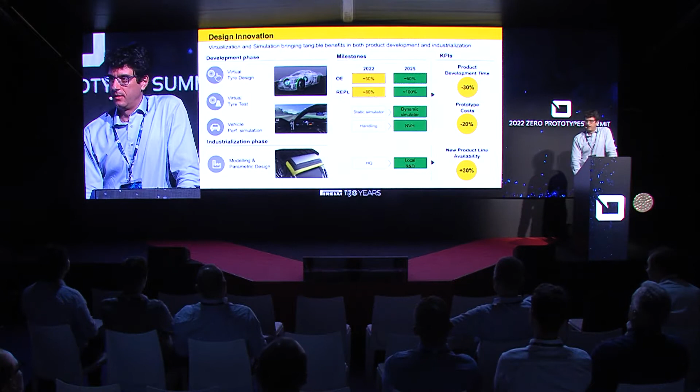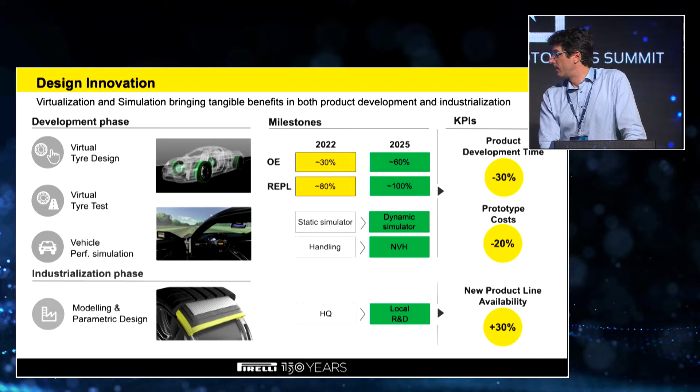Clearly, virtualization is the key enabler for this process. Virtualization that starts in the development phase from the virtual tire design that enables a kind of indoor virtual testing with simulations offline, and the second step, outdoor virtual testing with driver-in-the-loop simulators. The outcome of this process is that we are able to reduce by 30% the development time of our products, with the effect of increasing by 30% the availability of new products on the market, allowing us to reduce by 20% the prototype costs. Not yet zero prototype, but we are in the right direction, let me say.

Our plan is to develop for the original equipment. 60% of the projects that we develop for the original equipment will be engineered virtually, and all of the replacement projects will be designed virtually as well, in just 3 years' time.

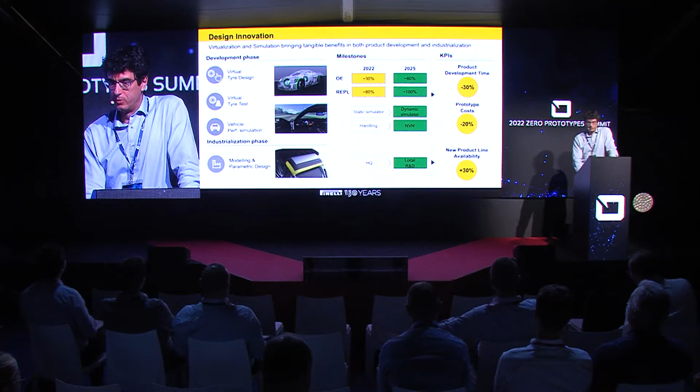Today we do this with the help of static simulators, mainly focused on handling. By 2025, we will do it with dynamic simulators, looking also at the performance of NVH, clearly. Well, we set a clear milestone when we started this experience and we set these targets for the company. The milestone was 2011, when Pirelli came back to Formula One, and we interacted with Formula One teams, which were already making extensive use of driver-in-the-loop simulations.

We started that path together with our partners, and then we moved from race to road, expanding these methods of development to road cars, and the first hypercar that was developed with a strong, intensive use of driver-in-the-loop simulators for the customer was launched in 2015. So at that time, we were mainly interested in the mechanical performance of tires, of the tire models.

But we soon realized that what is important for us is to create a tire which reflects the model performances. If until that time we invested a lot of research in creating models that were behaving like a tire, we had to add one piece, which is the other perspective: creating tires that behave like a model.

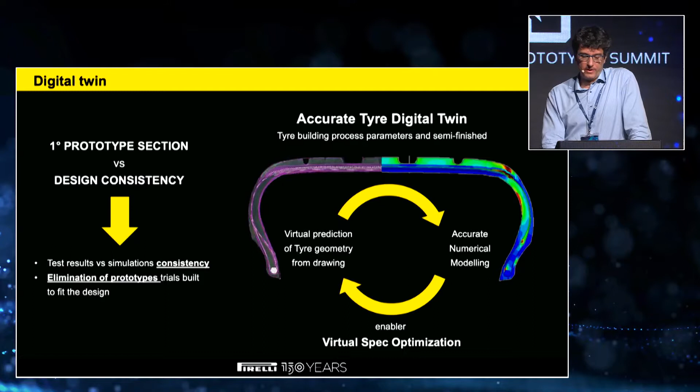And this, on the one hand, through virtual looping, reduces the development time. On the other hand, we also reduce the number of prototypes in the factory, because we don't need several iterations in the factory anymore to achieve the proper geometry, but we build the tires in the very first building, very, very close to the original drawing.

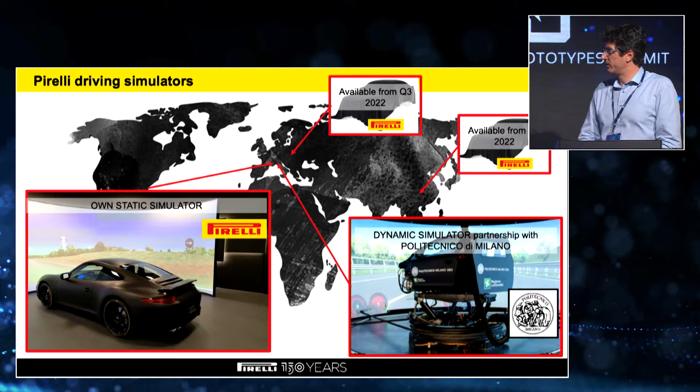So once we had this process in place, we decided to invest in this technology. We have a static simulator available in our facility in Milan. We have a collaboration with the Polytechnic of Milan, where they have a DIM 400. And then 2 new simulator facilities will be delivered to Pirelli in Germany and in China.

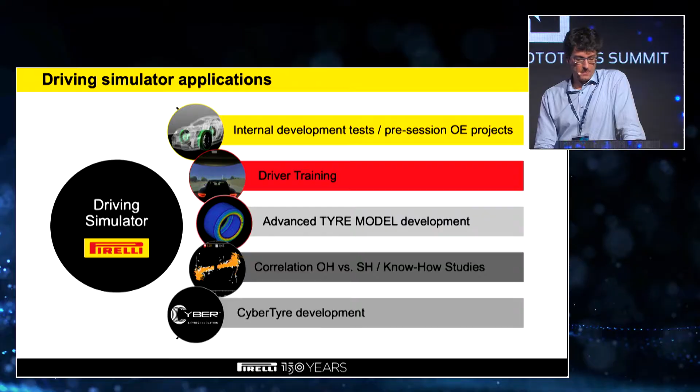So what do we do on all these facilities? I put some of the activities that we have in mind and are already doing. Clearly, development for replacement and original equipment, driver training. We do internal research on advanced tire models, and I will say in a minute why we do it. We do correlation work between objective handling and subjective handling, obviously, and we also do Cyber Tyre development.

So let's see in a bit more detail what we do, the way we see virtual tire development. First of all, we need a very close partnership with our customer in the original equipment environment, because we work on vehicles which are not on the market, and we have to exchange models with the customer. Models flow from Pirelli to our customers, tire models clearly, but models also flow from the customer to Pirelli, so that we can work on the next generation of vehicles in-house. We exchange encrypted models, which is a very good enabler for this process.

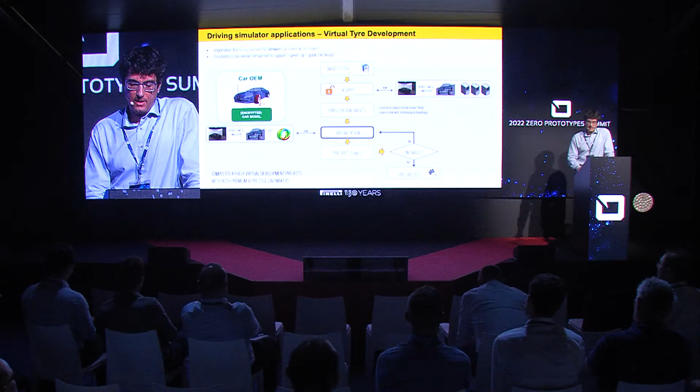We have from the customer a target letter, which is a heterogeneous document with target sets on KPIs, target sets for the tire itself, KPIs on the tire mechanics. There are some targets which are referred to the system, vehicle and tire, with KPIs typical from the vehicle dynamics. And there are some subjective targets which are a function of the system, vehicle, tire, and driver, clearly. So this is the key point.

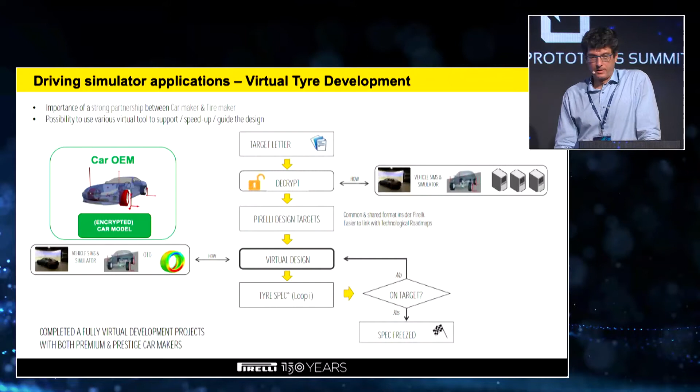With the use of simulators, we can translate all of these 3 kinds of targets into tire targets, Pirelli design targets. We put the driver in the loop, clearly, and we translate the subjective feelings into a real mechanical behavior for the engineers, so that we have a clear target for our team. This accelerates our development, because it's no more a matter of chasing a subjective feeling, guessing what the tire mechanical properties should be, but we have engineered that subjective feeling.

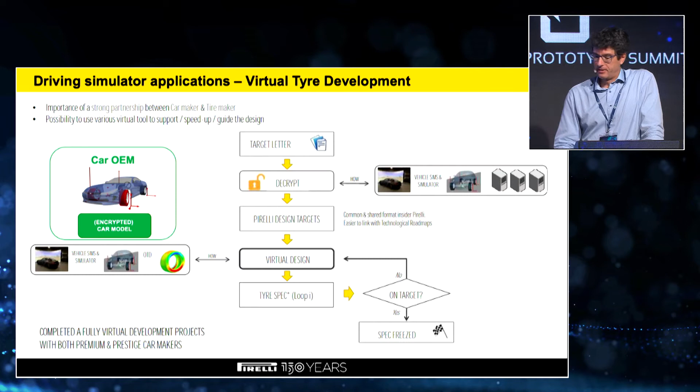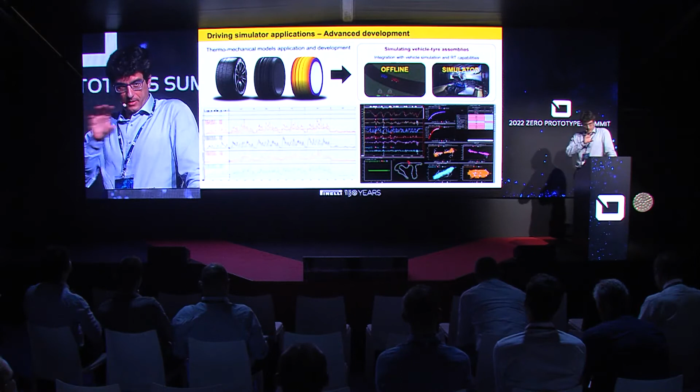The tire mechanical target is just representative of its behavior, like in the industry, you know very well, like a magic formula can represent clearly the mechanical behavior of a tire. We think that we have to go to that goal with physical models also. So that's why we develop advanced physical models on the simulator. Frankly speaking, these models are already available in Pirelli for offline simulations. They have to be tuned and developed to run in real time, and we think we will be very soon able to run these physical models in real time with additional information from thermomechanical behavior, let me say.

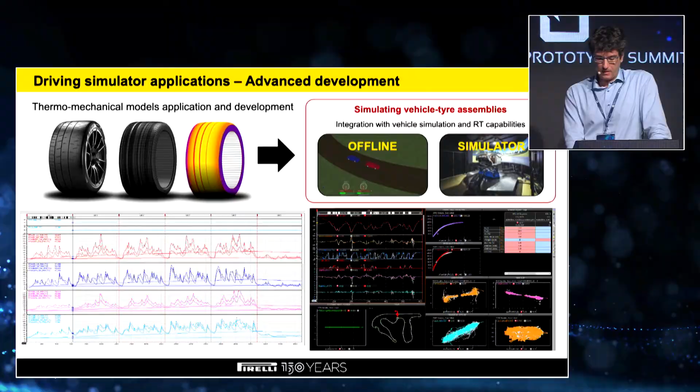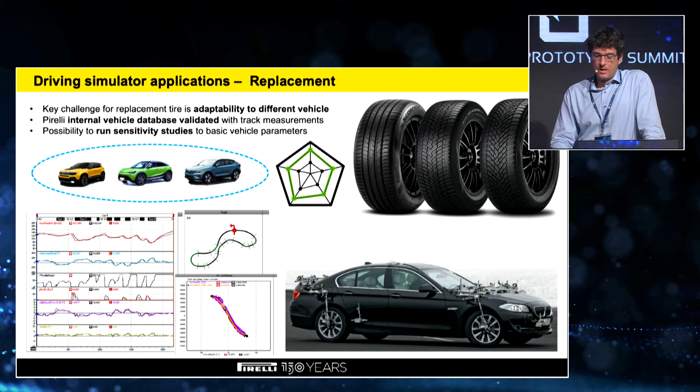Replacement lines. If for the original equipment we have to chase the perfect fit between tire and vehicle, for the replacement it's kind of the opposite. We have to produce a product line which is suitable to the whole market. So in this case, what we do is take a reference vehicle, a target vehicle, or maybe, frankly speaking, more than one target vehicle from the market, measure it with a K&C test bench, create the vehicle model, in this case not encrypted, we are creating it, and do the same virtual loop as described before.

But we add one piece. We can then modify the vehicle model that we have created to see how our product line will behave on different vehicles. Change from front-wheel drive to rear-wheel drive, change the mass distribution, and so on and so forth. You are much more expert than me in what we can change to assess if our tires will behave properly on a general purpose application.

Cyber Tyre also is a very nice challenge for us, because in this case, clearly we talk about electronics, and the unique use of the simulator is to investigate and understand how much the control systems of the vehicle can benefit from information coming from a sensor in the tire. We have some activity running on this, and we think that this will be a great enabler for ADS systems and autonomous vehicles in the very near future.

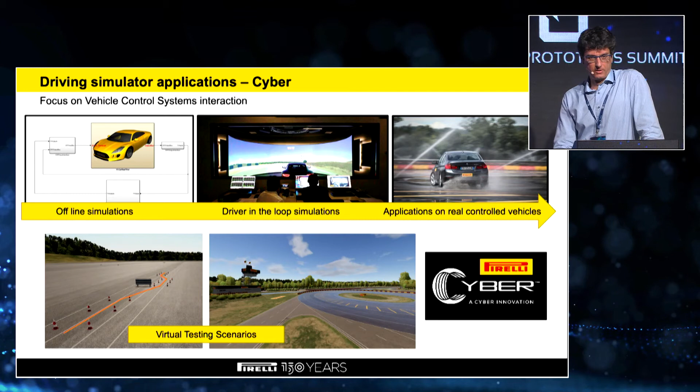So a lot of work has been done, but a lot of work still has to be done. And it has already been mentioned that the integration of hardware-in-the-loop and software-in-the-loop will be the next key enabler, at least for Pirelli. It already is for most of you, but it will be the very next enabler for development for Pirelli, because vehicles will be much less mechanical and much more electronic-driven. I refer to active steering, rear-wheel steering systems, and torque control, which become more and more complex, and the simple mechanical characterization of the vehicle might not be enough.

So that's what represents our next challenge: to design for ADS systems, autonomous vehicles, extending our field of investigation, not only in handling, not only in wet handling, but also in ride and NVH.